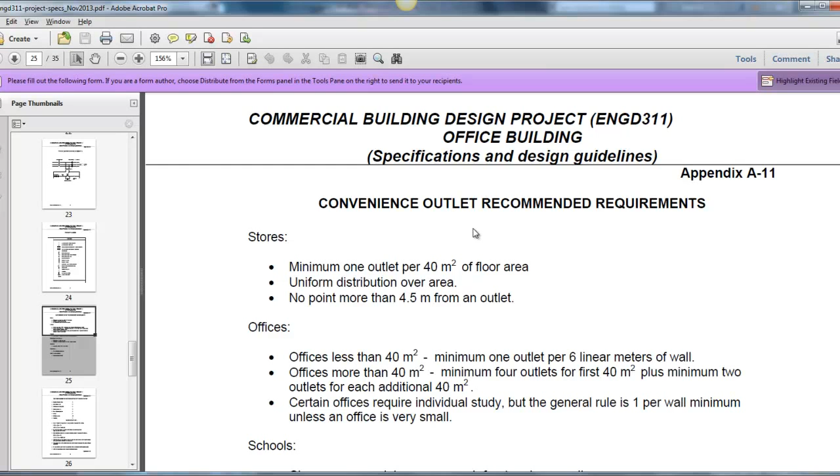Now if you take a look at what we're given here in the specs, these are the November 2013 version of the specs. Let's take a look at the convenience outlet recommendations. Now these are recommendations, okay? It's not set in stone, but they're recommended requirements. This is what the client ideally wants, so we need to make sure we try and achieve that. So for offices that are less than 40 meters squared, say 8 meters by 5 meters, minimum of 1 outlet for every 6 linear meters of wall.

Let's look at that 6 linear meters there real quick. That 6 linear meters says that for the distances between outlets, you need to have a maximum of 6 linear meters. You don't want any more than that. And we'll take a look at our plan. We'll see that we're probably going to achieve less than 6 meters, but for the most part, we're going to aim for that 6 meter or less distance.

Offices that are a little bit larger require a minimum of 4 outlets for the first 40 meters squared, plus minimum 2 outlets for each additional 40 meters. Now, don't get bogged down with the numbers on this one. Don't worry about it. If you just use common sense, and I'll give you a few techniques that you can use, you'll see how this will all just work out. Certain offices require individual study, and we'll see what those offices are, but the general rule is 1 per wall minimum, unless an office is really small.

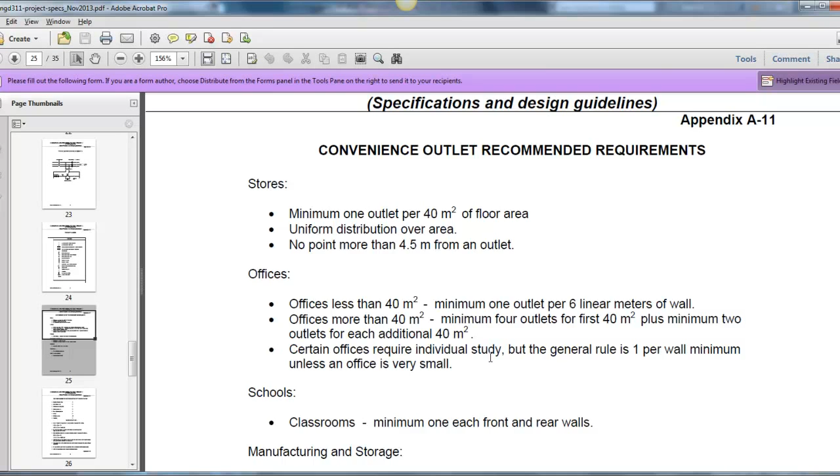Now the other thing we want to look at is manufacturing and storage. Minimum 1 outlet per bay. And the electrical is surface mounted, so it's easy to add on later. Surface mounting basically means that it's not embedded into the walls. It's actually mounted on the surface using conduit, which means that they can pull that conduit out and redo it anytime they need. So if the needs of that room change, it's very easy for them to change. So you want to make sure you reference these specifications.

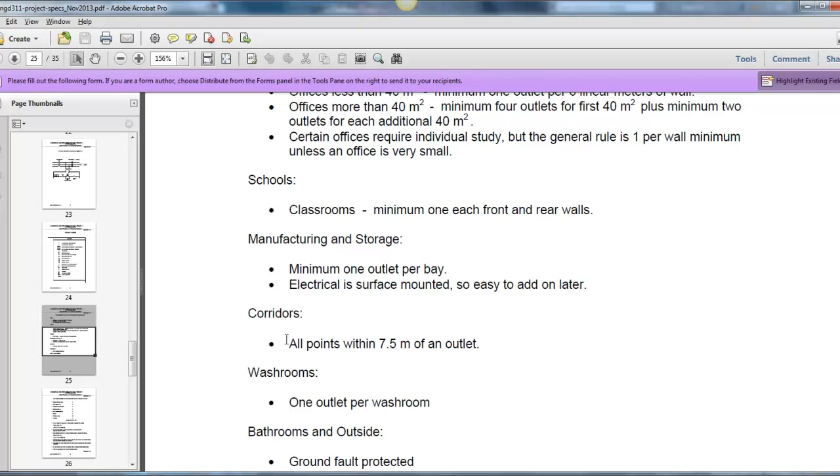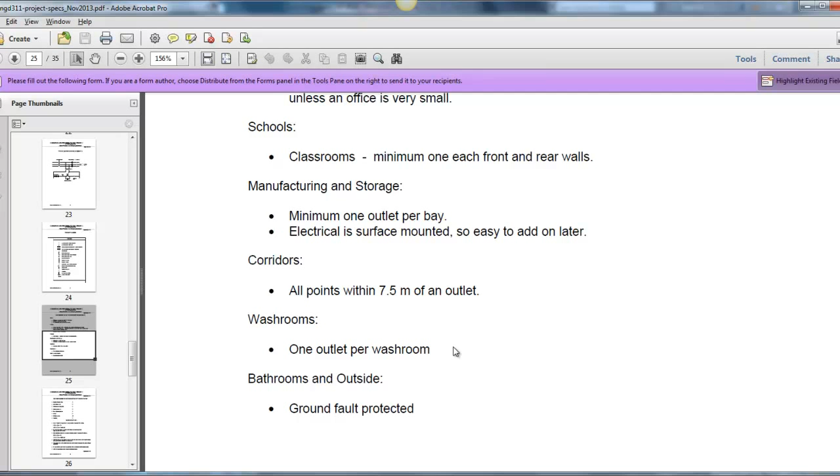The other thing that we're going to look at as well is corridors. All points have to be within 7.5 meters of an outlet. And washrooms, obviously, we need to have 1 outlet per washroom, so that if somebody needs to bring in their shaver or blow dryer or something like that, they can actually plug in in the bathrooms. And the bathrooms have to be ground fault protected, which is GFI. And we've got those symbols all ready to go.

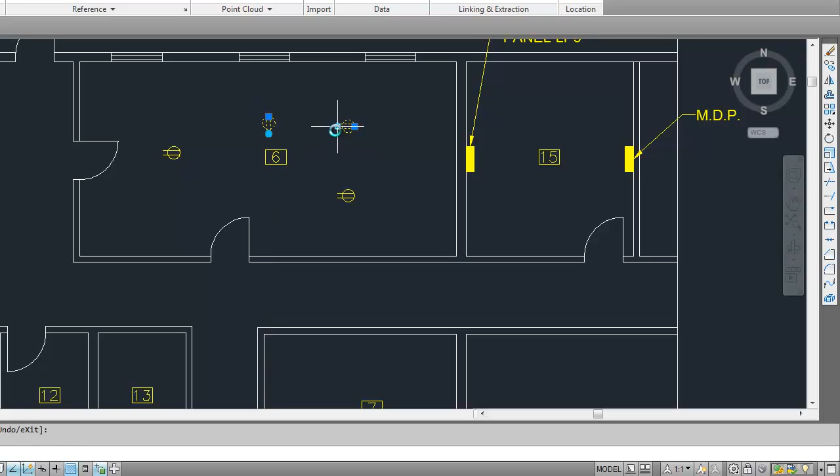So let's flip back over to our AutoCAD drawing, grab a copy of our actual symbol, and place just a few of them. I know I'm going to need a minimum of 4 because we need 1 per wall, right? So I'm just going to place 4 in here, and I'm going to flip them so that they are 1 per wall. I'm just going to highlight them all and flip them in the directions that we want them to go. Okay, so we got this one going that way there.

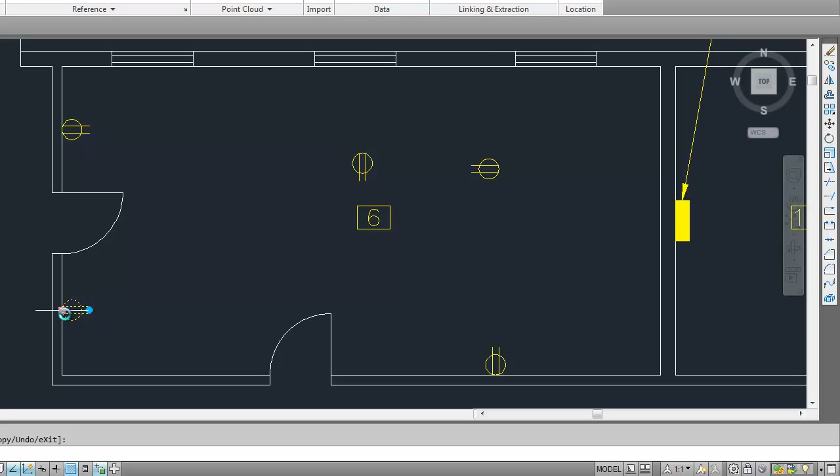Now what I'm going to do is place them sort of at the midpoint of all the walls, literally on every midpoint. I'll create another one there, and another of these ones here, because I want to place it at the midpoint here. Now I know this is going to seem like a little bit of overkill at first, and it is, but I want to show you how we can use this as one of the techniques for laying out all of the outlets in a wall. I missed one here. Every usable wall space has its own outlet now, if you look at the way that's laid out. Now we're going to notice that there's some that are obviously too close together, so we're going to have to eliminate at least one of these.

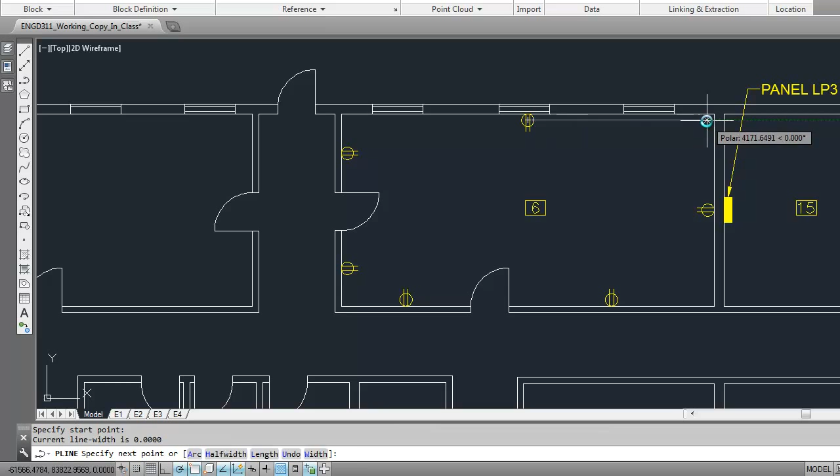And there's some where there's a little too much spacing there. So let's just take a look and see what our 6 meter line looks like. So I'm going to create a P line, and I'm going to draw it from here along the outside wall and come to here. Now I know that's not going to be exact, but we don't need it to be exact. And we're going to see how much we have here. So we have a little over 6 meters.

So I would say that's just a little bit too far away there. So just to give you a little example of what's not right, that's a bit too far away. Now I don't want to move this one, but I think I got a little bit of room to move this one. So let's move this one over a bit. Let's move it maybe, say to there, and that leaves us with a little bit of space left over where we can actually now create another one that would sort of be an equal distance away. And I think this is actually a decent layout here.

Now let's come back to this corner. We've got too many here. I think this wall is actually bigger than this wall, so I'm going to delete, make sure I don't delete both symbols. I'm going to delete this one here. What I might do is I might actually bump this one a little closer to the corner. And that just sort of keeps it sort of an equal distance from both sides of that wall.

And you'll notice here that we likely have less than 6 meters to this outlet, less than 6 meters to this one, and we have less than 6 meters all the way around. Yet every wall is pretty much covered. So if you imagine a piece of furniture, a desk, or something in one of these offices, you can pretty much place your desk at any point in this office, and you will have easy access to one of the outlets.

Okay, now it may not be convenient. You still may have cords. Like if you imagine somebody has a desk in this corner here, they're probably going to plug into this outlet here, and they might use this for plugging their phone, or maybe there's another desk that's going to be placed here. So it just kind of gives you a little bit of an idea.

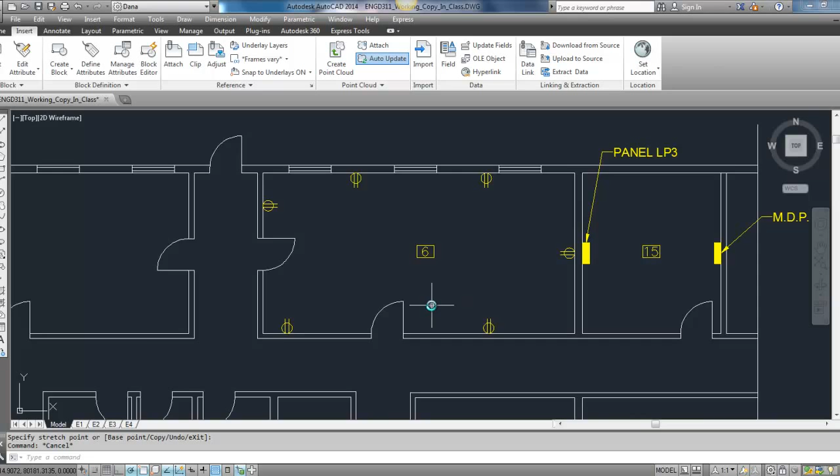So again, the process, let's repeat that for this room over here, is we're going to place enough outlets for each of the four walls of the room. We're going to change the orientation of those outlets to the wall that they're going to be on, like so. We're going to place them in the midpoint of every wall. And of course I'm going to need some more here, but I'll get to that in a minute. But place it at the midpoint of every wall. Looks like I'm going to need an extra one on this wall over here.

Now you might be saying, well, this wall is the same as this wall. And yes, it is when you're in that room. Essentially it's the same wall. But because it's divided by a door, we actually want to make sure that we treat it as a separate wall. Same thing with this one over here. We're actually dividing this wall by a door. So we're going to treat it like its own wall. All right, so now we have one per wall.

And if we just sort of start from one direction, you'll see that these are a little too close together. So I think I could probably delete this one, and I might move this one over just a bit. Say something like that. I think this one's okay there, but we might want to bring this one a bit closer because it's a little too far away. And I'm going to make a copy of that one now, and I'm going to place it against this back wall here. And I'm noticing that I got a little too much space here as well.

So what I think I'm going to do here, now this is sort of an unusual room because of the fact that it has so much wall space at the back here. What I'm going to do is I'm going to more evenly space these outlets here. I might bring this one even just a little bit closer to the corner and space this one just a little bit more evenly here. I even got a little bit more room along this way, so we'll just kind of do something like that.

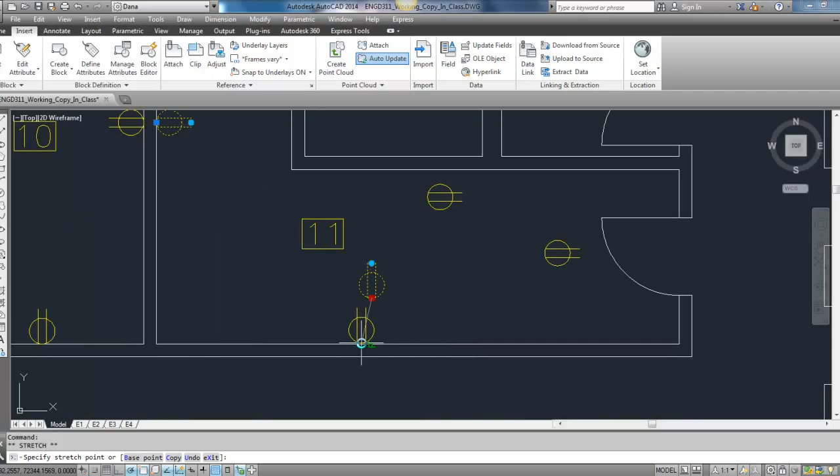Let me just go ahead and move these. I'll place this on the midpoint. Move that. Might as well place it while I'm here. I can find the midpoint. I think I'm so close with the... oh, there we are.

I think this room, yeah, again, this wall, it's too small. There's not going to be any outlets. If you put an outlet behind there, it's not going to get used. And we'll take a look at this wall here. And this wall, again, it's more of a hallway more than anything. So I really don't think that we need one there.

I think if we deleted this one and moved this one maybe a bit closer to the corner, I think that would actually be able to handle both walls. So again, looking at that usable wall space. If I'm not sure, I'll take my P-line and I'll just draw a line like so and just measure, and it shouldn't be any more than 6 meters. So yeah, 4.26 meters. So I think we're pretty good there.

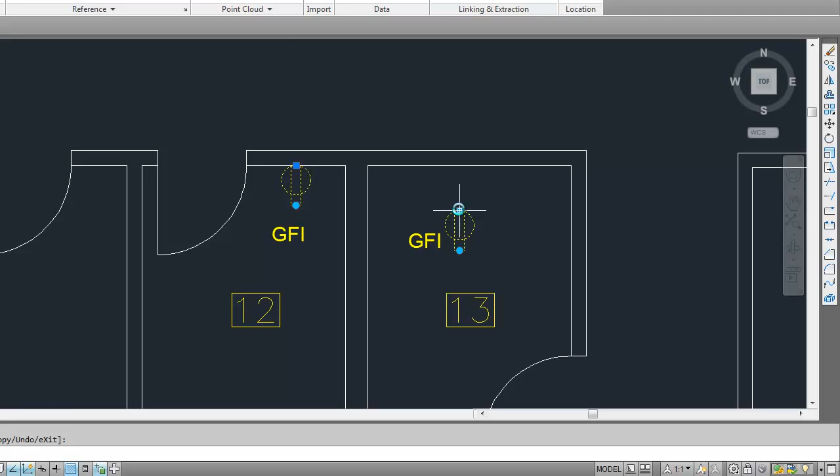Okay, so now let's take a look at room 12 and 13. Now room 12 and 13 are actually the bathroom. So the bathroom is going to require GFI, and that's ground fault interrupt. And we'll grab our regular outlet here. It's a ground fault interrupt, which is basically if somebody were to drop a blow dryer into the sink, it's going to turn the power off immediately so that nobody gets zapped or killed or anything like that. So you kind of have to picture what the layout of this bathroom might look like.

Now I've just placed those for now just sort of arbitrarily, but if you imagine coming into this bathroom, where you would likely have the vanity, it's probably going to be close to this door right here, and you probably have a toilet over here. Again, you don't need a shower. This is just an office building. It's not going to have a shower. So you probably have your vanity and you'll have your toilet. Same thing here. When you walk in, you normally have the vanity right near the door, and then maybe your toilet at the end. So this is probably not the best location for this one.

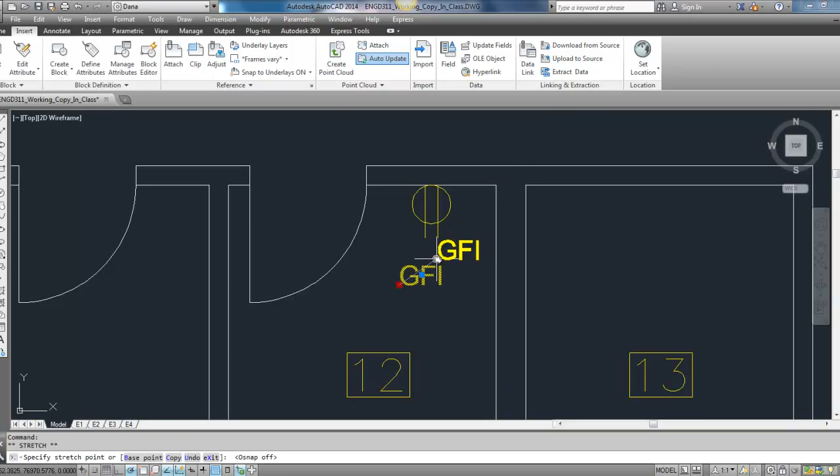Let me flip this around, and I'm going to place this one against this wall here. I'm actually now going to move this so that we kind of connect it to the actual outlet itself. Same thing with this one here. I want to more or less connect it. Whoops. Turn my snap off for a second. More or less connect it so that that outlet is identified as a GFI outlet. And that's important. Those bathrooms need to be GFI outlets.

Next thing we're going to look at is room number 14, the shop. Now room number 14 is kind of an odd duck. Reason being is that it's going to be the shop, which is going to have lots of equipment in there.

So not only are we going to have our motors, but we're also going to have individual outlets against the walls. Now these are movable outlets. If we go back to our specifications here, this is where we have our manufacturing, where it's surface mounted and easy to add on later, and minimum 1 outlet per bay. We're going to have more than that. What we probably are going to end up having is at least 2 per wall.

So I'm going to create the ability for us to have 2 per wall, and we'll take it from there. So now I'm going to rotate these first, and I'm going to place them on the exterior wall.

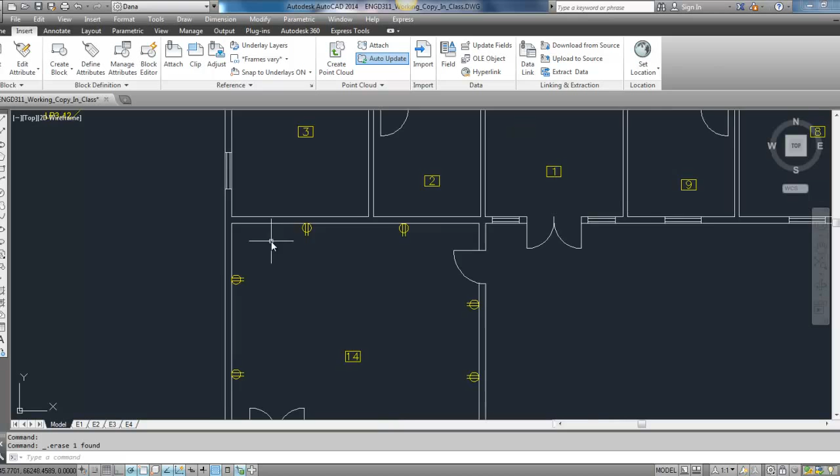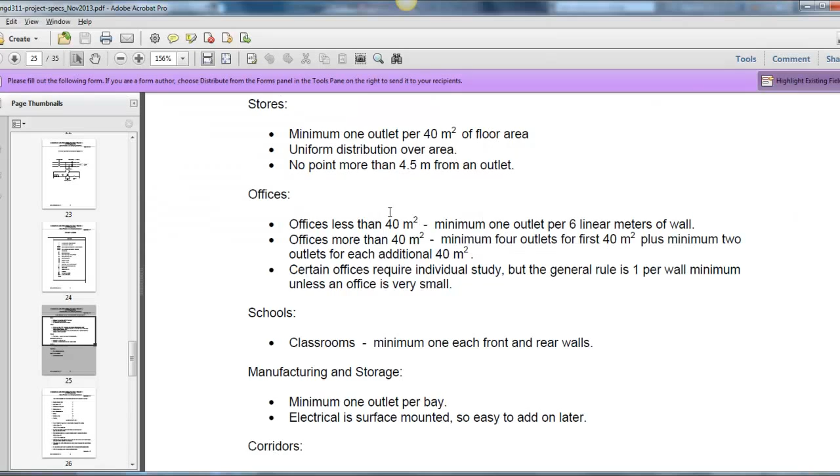So for the corridor, if we go back to our specifications and look under corridors, all points within 7.5 meters of an outlet. So let's see how long 7.5 meters is. I'm just going to draw a line that's 7,500 long, so we can see just how long a 7,500 line is.

If I were to place a bunch of outlets all around the corridor, you're going to find that there's too many, right? So we need to try and limit the amount of outlets that we have here. We don't need that many. I think we're going to need probably 1 in this section of the corridor. We're going to need 1 in the foyer for sure.

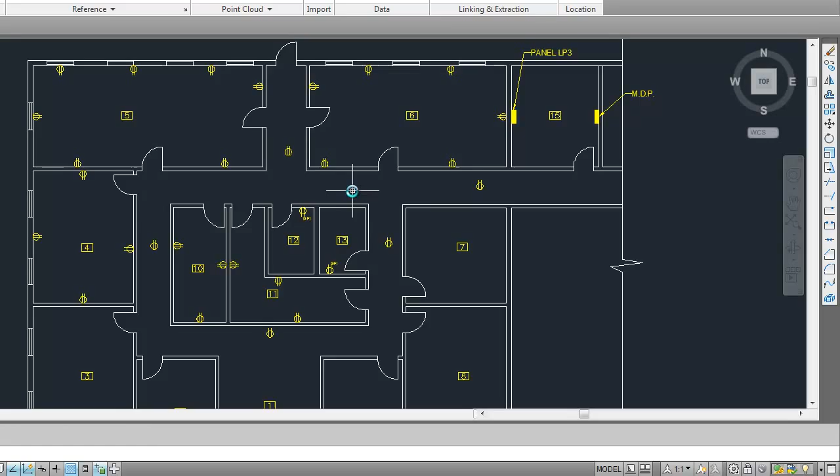We're probably going to need another one somewhere in this foyer, if we do 7.5 meters, probably somewhere around here. And we likely may need another one around here. We've got this outlet which can kind of help to bridge the gap here. We might need another one over here. Now this is just preliminary. We're going to do a little bit of work on this to see how close we are, but we'll use this as a bit of a guide to begin with.

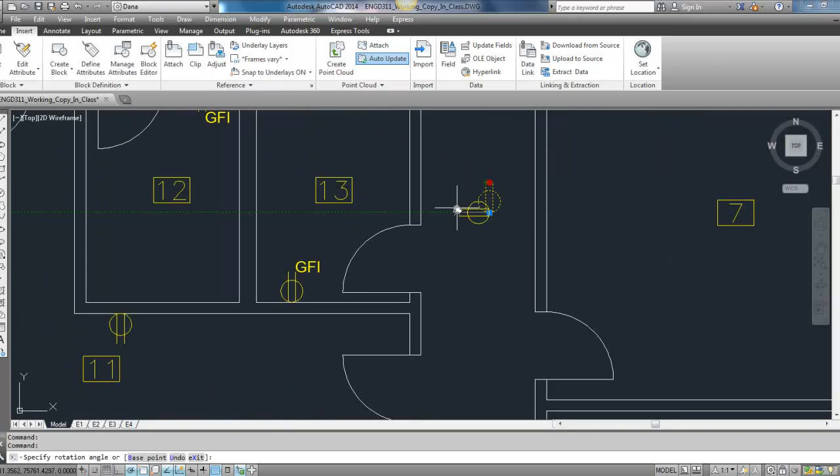And what this is for is, think about the machines that they would be using in the particular office building. They'll be looking at floor polishing machines. Those machines are likely going to require a 15 or 7.5 meter long extension cord. And so we need to make sure we have enough outlets within that space to accommodate that. Okay, I think we may have it pretty good here.

So again, let's check with our P-line, and let's just do one from here to here. Now that shouldn't be any more than 15 meters. We've got 10 meters there, so I think we're going to be pretty good. So let me just delete that. Do another P-line command, and let's see how much we have now. 7.5 meters for any point along that. Well, yeah, we'll be fine there. I'm not worried about that. Might even be too much.

Let's just try seeing what the distance is from this outlet through the corridor to this outlet. Let's see if it's less than 15 meters. It's about 19, so it's a bit more than the 15 requirement there. Because 7.5 meters from any point means I can go 7.5 meters in both directions, which is a total of 15 meters.

Last thing that we're going to look at here is room number 15. Room number 15, because it is the mechanical room and the electrical panel is right there, it's really easy for anybody to tie in electricity to the electrical panel. So near the panel, we're probably not going to require very many. Again, we're going to stick to a maximum 1 per wall here because we don't need as many, and we're going to keep that a fair distance away.

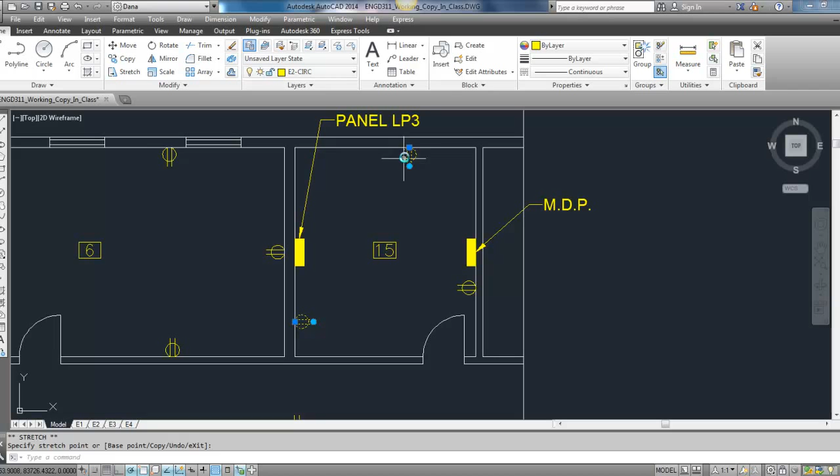Normally, they usually position one outlet on the electrical panel itself, and so that's pretty much all we're going to need for this particular room. It's just 1 per wall maximum. Okay, and the panel comes with an outlet, so we don't need to worry about that too much.

So that should get you going in terms of laying out all of your individual plugs or outlets, convenience receptacles. You'll have to do the rest of the rooms yourself, but they should be fairly straightforward. And next we'll look into circuit labeling, so labeling those circuits. That'll be the next video.